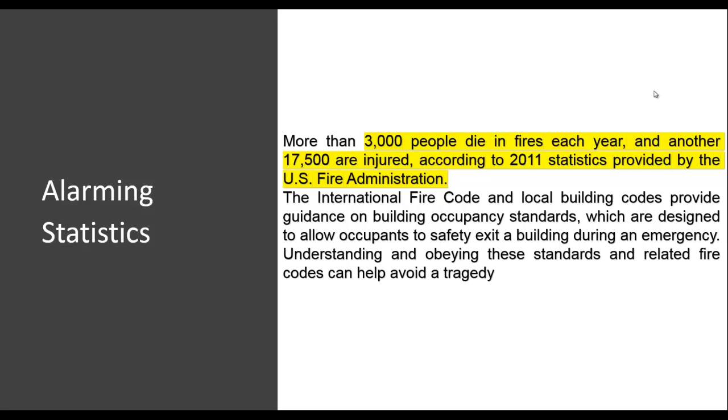When it comes to fires, the statistics are alarming. More than 3,000 people die in fires each year, and almost 20,000 are injured. FEMA creates reports on civilian fire fatalities in residential buildings, where they find that the most notable factors contributing to fatalities are fire patterns, egress, and escape problems. The egress problems include limited exits, and escape factors include excessive travel distances to the nearest clear exit.

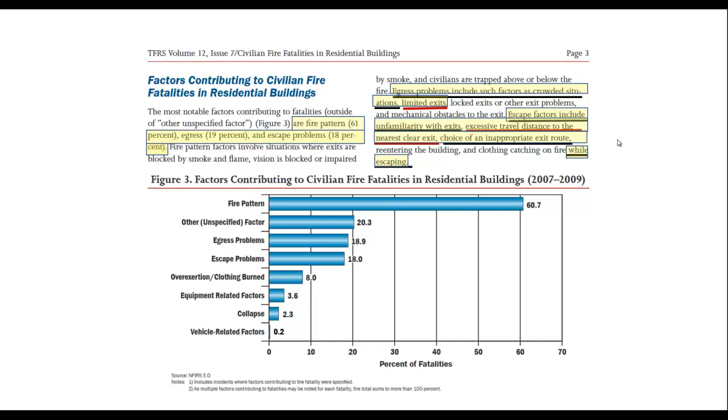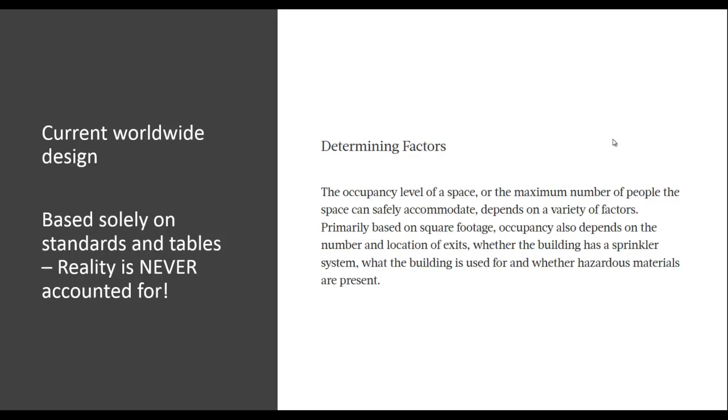Fatalities occur while people are escaping. So with a well thought out plan and multiple escape options, chances for survival greatly increase. How is it done? Currently, egress design is based solely on standards and tables. Reality is never ever accounted for. Pretty much you divide the square footage of the room by the square footage required per person, and it tells you the widths of what? Of stairs, of doors, and the hallways.

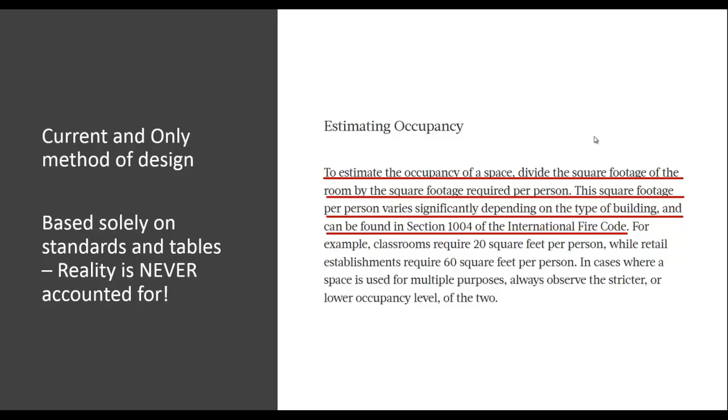That's it. So if you follow these tables, not reality, just these tables, you're more likely to survive under emergency conditions. So where's the reality using this approach? Don't even look for it. There is none. Each project must be designed with evacuation routes, and they are. But these routes are based solely on occupancy factors to compute these widths. But this approach never analyzes reality. Life is never analyzed. Architectural layout where walls, furniture become obstacles.

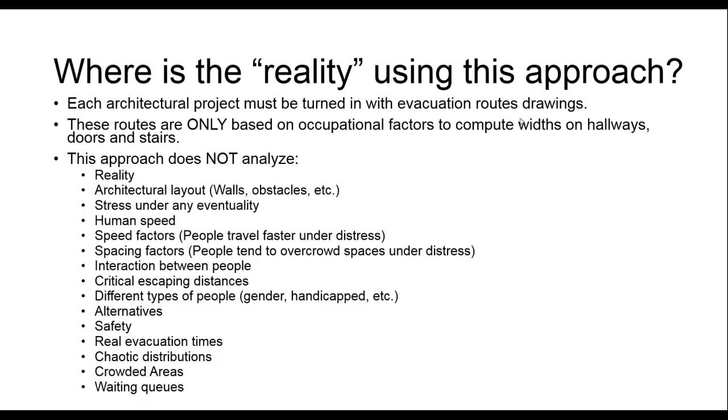Stresses under any eventuality. Human speed, speed factors, spacing factors, interaction between people, critical escape distances, the different types of people, the gender, if they're handicapped, the alternatives, the safety, real evacuation times, based on everything that we've talked about, chaotic distributions, crowded areas, waiting queues.

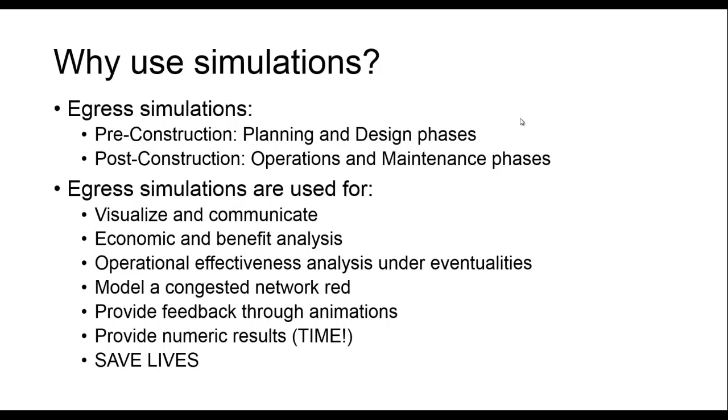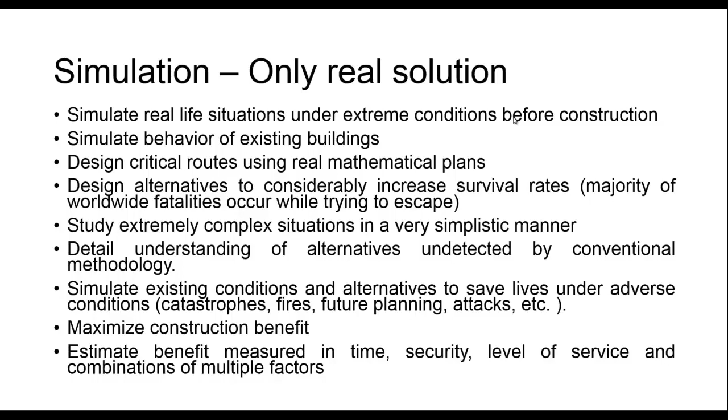Why do we use simulations? Well, we use it for a number of reasons, but the most important is to provide numeric results. Time, because time saves lives. Simulation is the only real solution. Why? Because you simulate the behavior of people. You simulate the existing conditions and alternatives to save lives under adverse conditions. You estimate the benefit and the level of service, security, and mostly because you save lives.

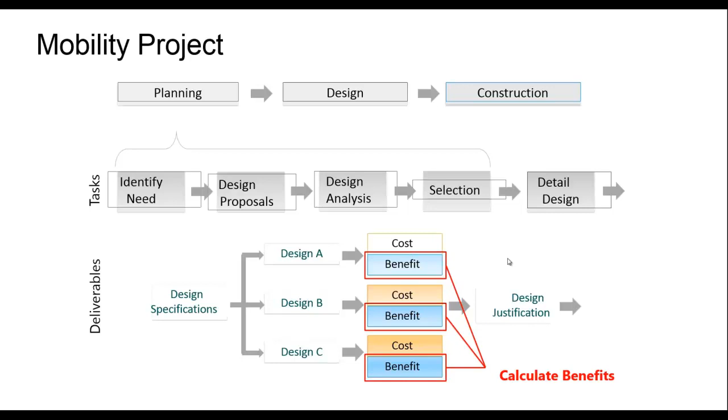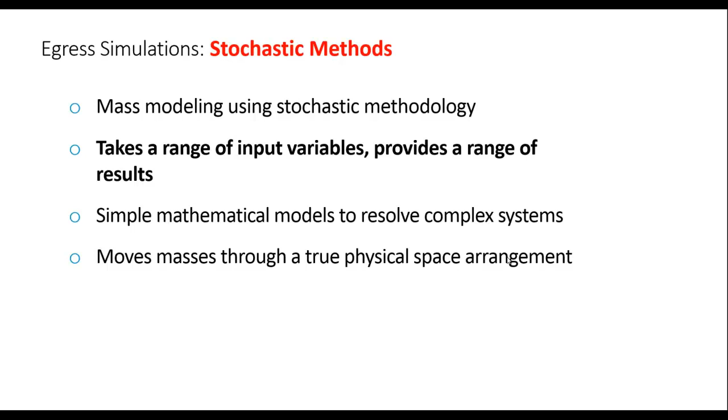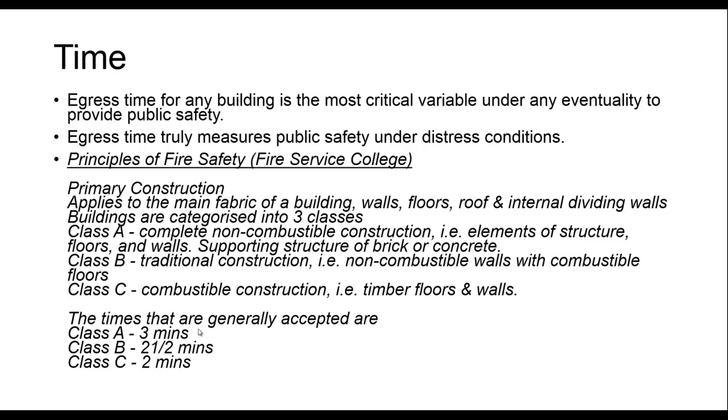What is mobility analysis? It's the study of people interacting on complex networks, minimizing congestion problems under critical situations. So for any mobility project, you have different designs. Each design has its own benefits, so we compute the benefits that along with the cost, it's going to give you the best option. And we model using stochastic methodology. It's not constant, it's stochastic, and it's based on probabilities. Why? To provide time. So time is, again, the most critical variable. And what does the code say? The code says that anything above 3 minutes decreases considerably the chances of survival.

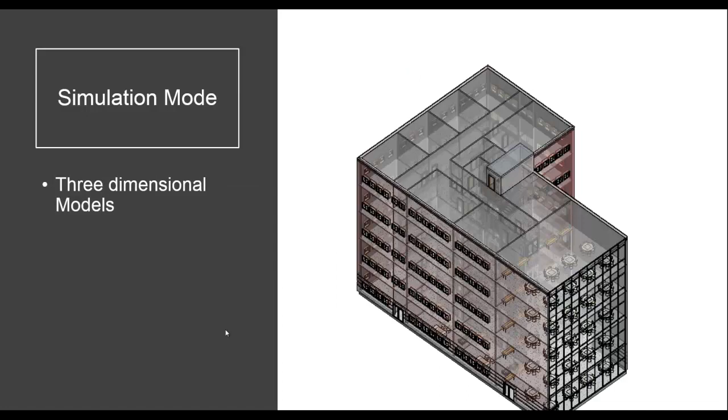How do we simulate? We simulate either two-dimensional, you take a picture of any architectural drawing, that's it, or you can even bring in a 3D model, and then you can visualize the simulation in a much nicer way. So if the simulation is done only based on 2D, you can see the architectural drawings here, and they are evenly spaced based on the height, and I just put some stairs to connect the drawings. And this particular building has 5 floors, and they have 2 exits on the south, 2 exits on the north, and that's on the bottom floor.

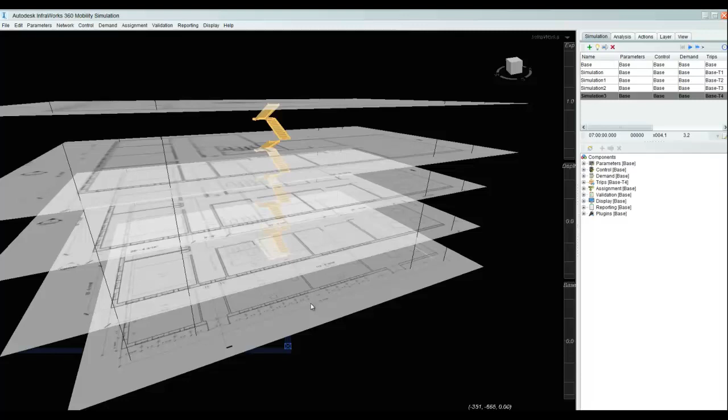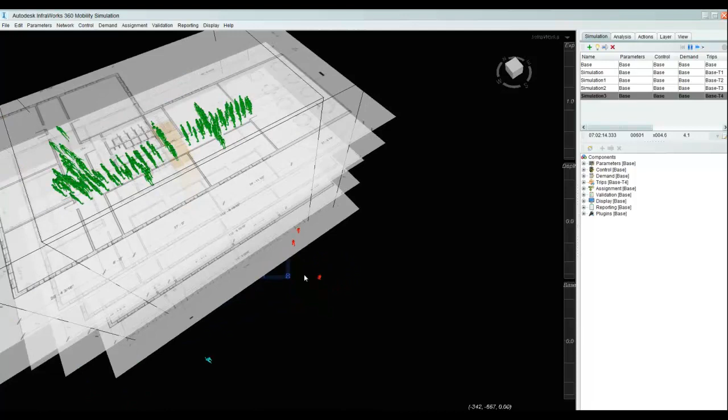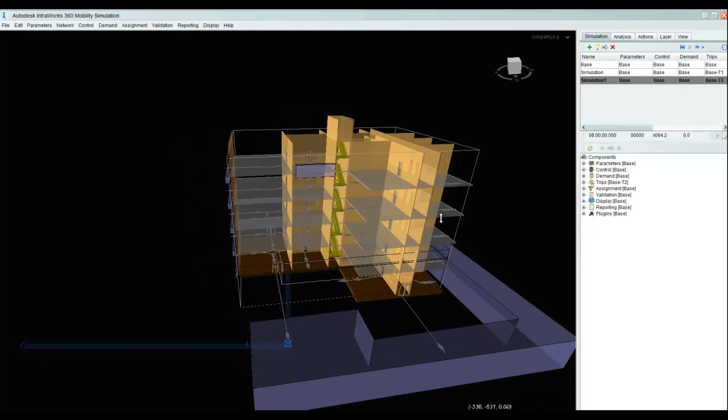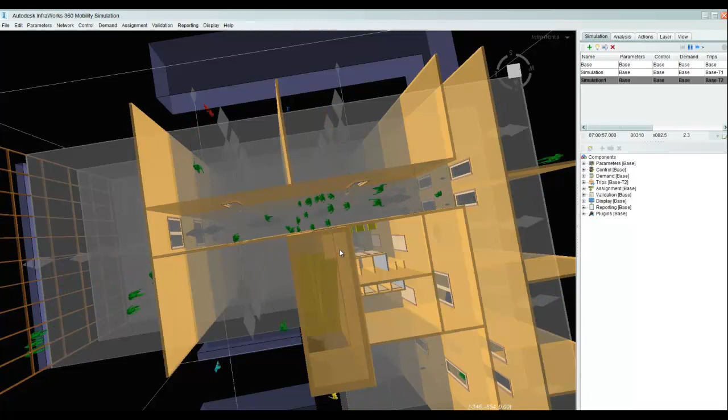It's exactly the same building now being constructed in 3 dimensions, and if I play the animation again, I can see that those people are being alerted once the alarm goes off. But in the stair core on the 5th floor, which is the most critical, of course, because you're only providing one escape route, it's going to get crowded rather rapidly. At 57 seconds, it's almost impossible to leave. And the problem's even compounded because people in rooms can't even leave. So you can see the problem that I have here.

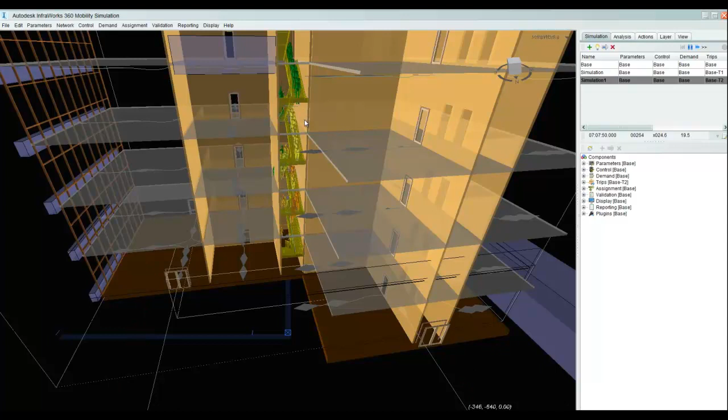And if I speed up the animation, well, what am I after? I am after times here. I can really evaluate how long the last person on the 5th floor is going to take to evacuate the building. So it's completely inefficient. With this only escape route, these floors have to leave before the top floors are even thinking about coming down. So I can evaluate the results on how long the building took for complete evacuation. I can see that this took 13 minutes and 35 seconds. Completely inefficient. Design is extremely poor.

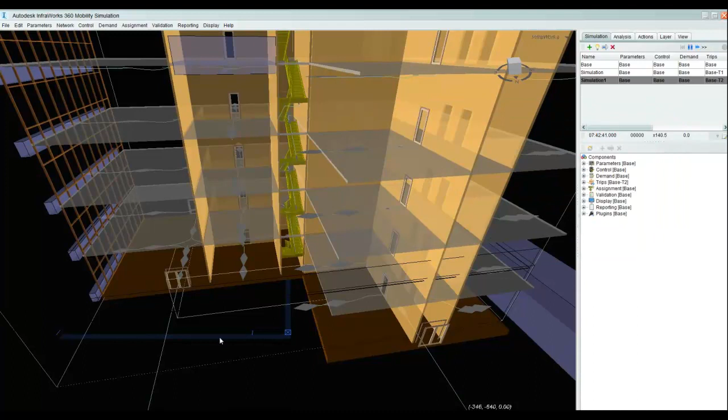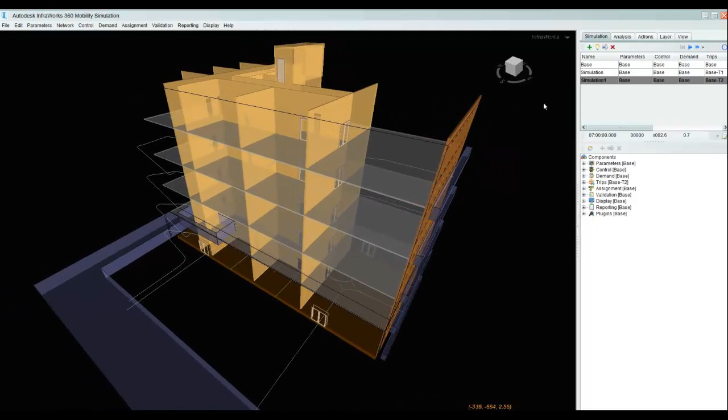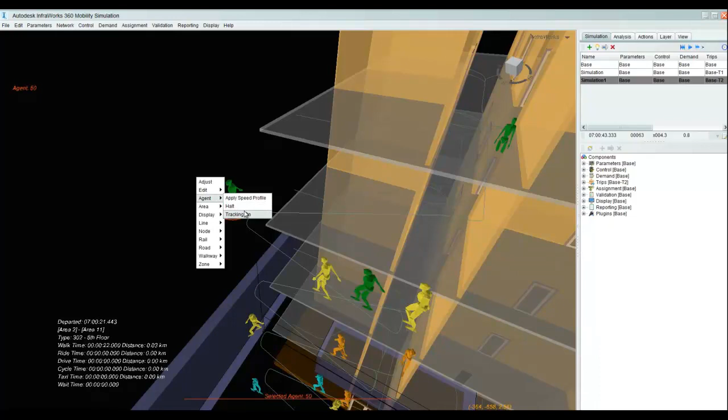The people can move along this new infrastructure, and I can see the wait time and the walk time. I can certainly do that, and this agent can even be tracked, meaning that if I play the simulation, I can go along with its own path. So you can see that everything is dynamic. I'm going to pause it here, escape, and then play the complete animation so I can evaluate.

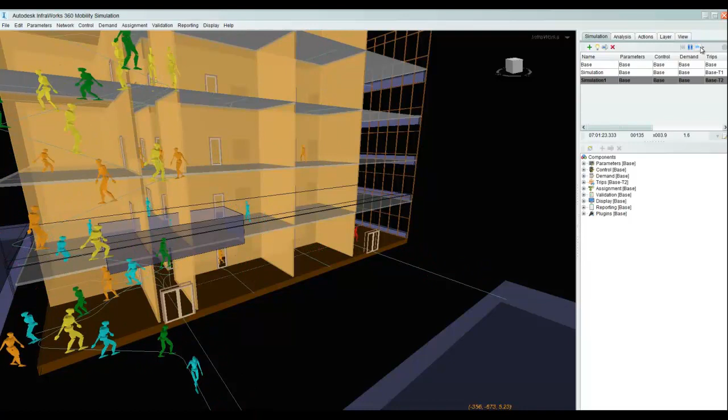So if I hit play, even going to speed it up, and if I evaluate the time, it only took 3 minutes and 28 seconds. You just increased by 70% the chances of survival, doing it with intelligence rather than tables. Human lives are priceless.